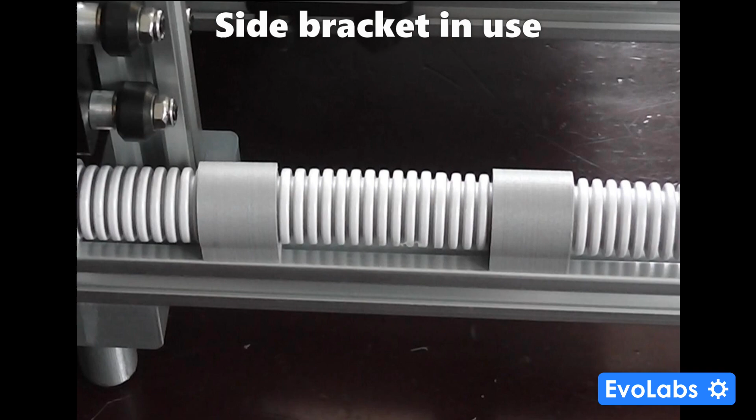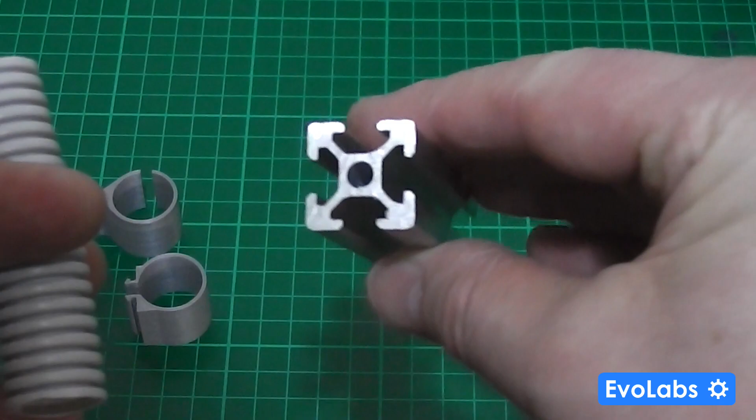So as part of my EvoLabs EV1 printer design, I'm using this 20 by 20 profile, T-slot profile aluminum for the bottom and top frame parts, and I also decided to use this 20mm conduit, this electrical conduit, to route my wires through.

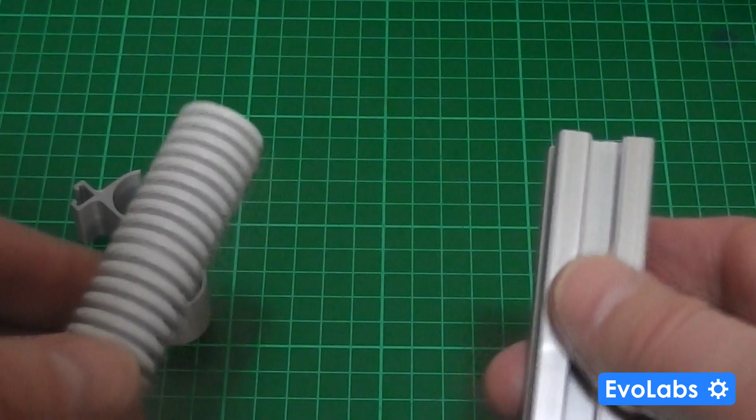And I have a constraint in that one side of the T-slot will be flush up against the proposed enclosure walls that I'll be using. So I need to have a bracket that's not going to hang off the side of the T-slot, and also be able to position the conduit either on top or at sort of at this corner angle here, simply because of the way that I've done the design and the feet for the printer that get in the way. So I ended up coming up with these bracket designs.

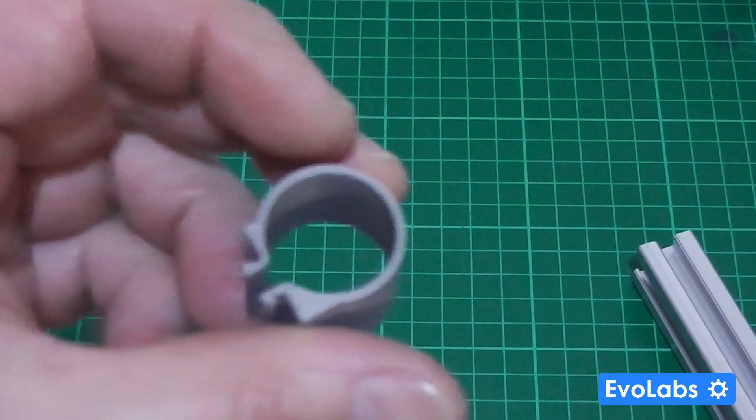So this is the first bracket design I came up with, and let's see if the camera will zoom in, focus on there. As you can see from this shot here, the slot is offset, because the intention is that this will slot into there, like so, and that there is flush. The side of the wall is flush with the side of the T-slot, so that when we place the conduit through there, like so, it's going to work, and we can still slide it.

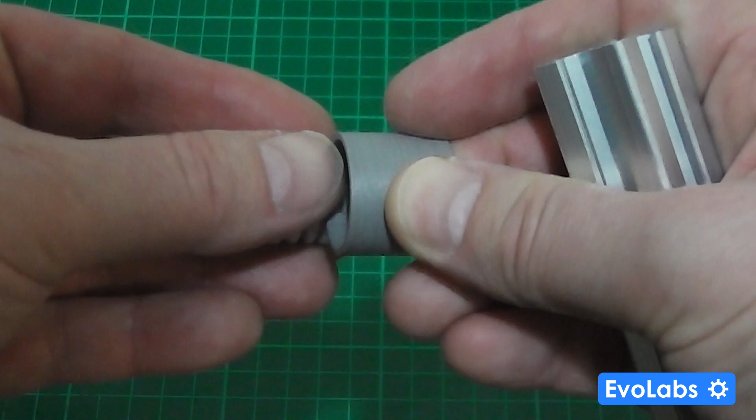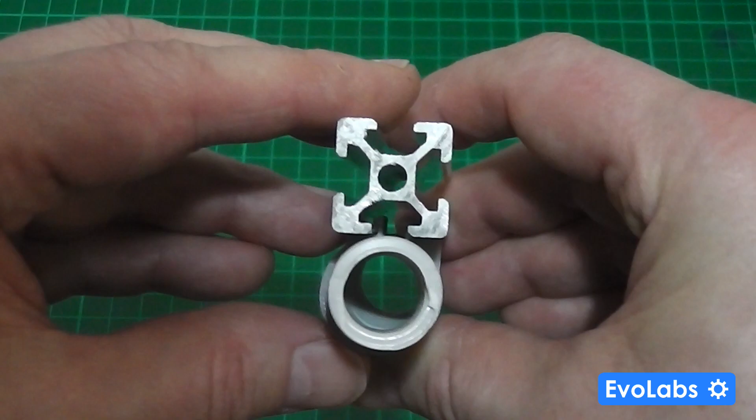So I deliberately designed this part to be flexible enough so that I can actually push the bracket over the conduit. Let's go back again. What's that? Over the conduit like so, and then if I squeeze it in tightly enough, like this, I can actually plug it in and still have it fairly nice and snug there. So that's the first bracket I came up with. So this is for when I'm running the conduit on top of the rail, or vice versa on the bottom of the rail. That's the first bracket design.

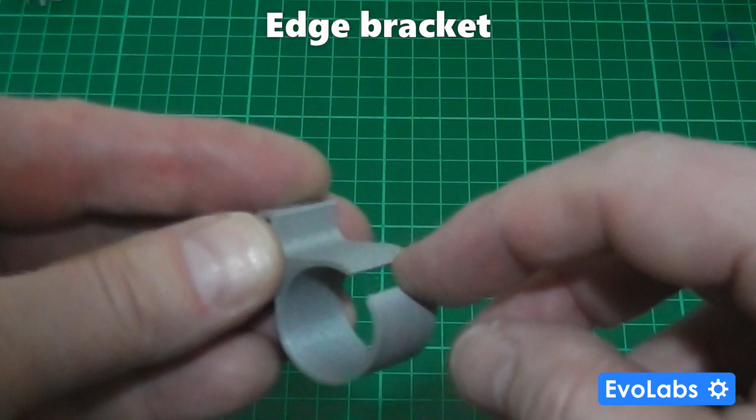And the second bracket design, as I said, has this opening here, so I can of course just slip on, if I just pull it apart, keep it in camera range, slip it on like that, as you can see there. And the intention is this is a corner bracket, so if I take my T-slot profile, the idea is it goes on like so, and I push it in, and there we go. It clips onto the corner.

And again, I can still push this back and forth if I need to. And if we need to pull this out, we can. And it's back up again, like that. So I designed both the side and the edge bracket in Fusion 360. And here's the side bracket.

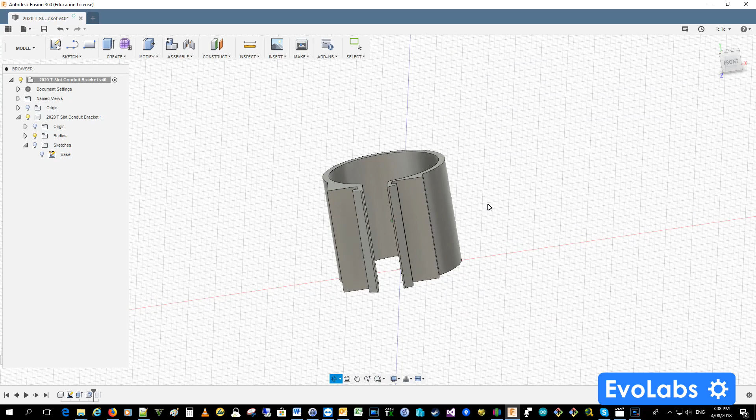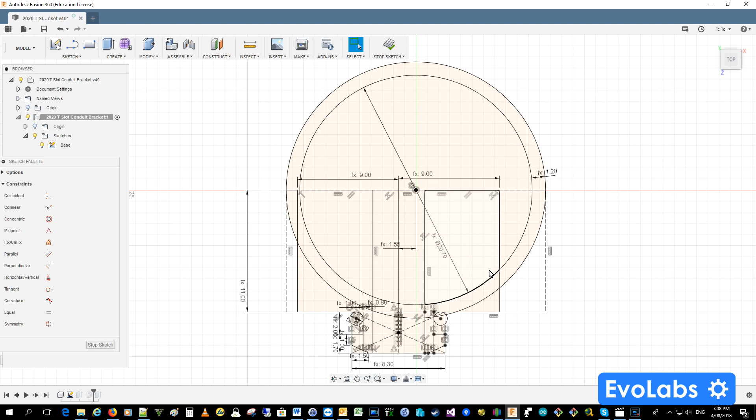And the design presented several challenges. Mainly, I needed to make sure that once the brackets were printed, they could easily be snapped into place and removed repeatedly, and their position adjusted without actually breaking the bracket itself. So I spent quite some time just tweaking the dimensions, especially for the area here, where it forms a catch to secure into the T-slot profile, and also to make sure that the wall of the bracket is strong enough to resist any pulling of the conduit as you're applying the bracket, or fixing the bracket, and also in general use.

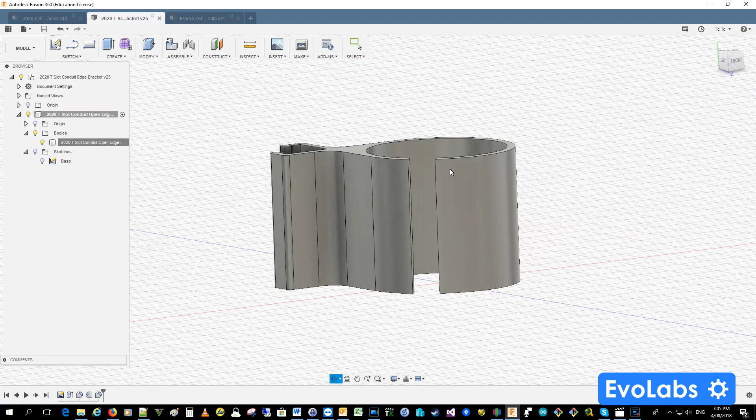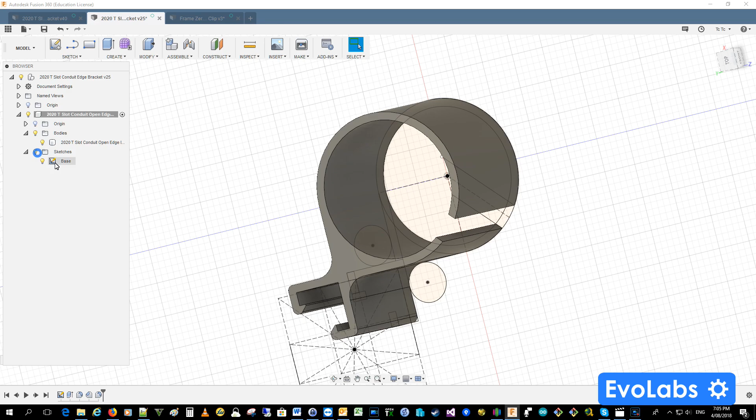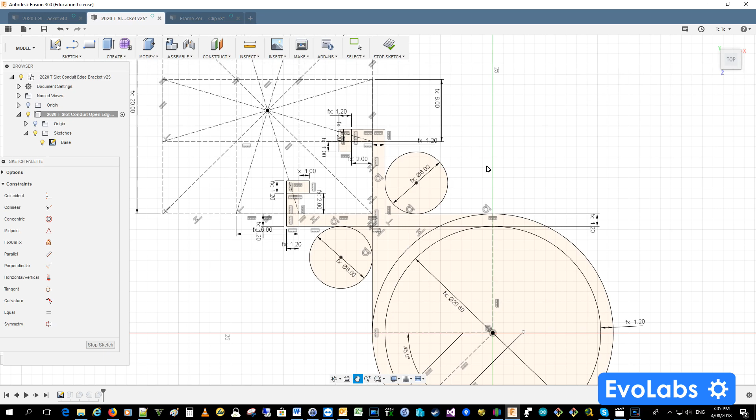So for the edge bracket, the similar challenge was to make it easily snapped into place and removed, and again, its position adjusted. And because of the way I designed the bracket to secure onto the corner of the T-slot, I needed a space within the cylinder that holds the conduit, so I could easily push the conduit onto it and pull it away. Now I could have designed this so there wasn't a slot, but it's just easier to do it that way. If there wasn't a slot, it would limit the conduit to being pushed through rather than attached when necessary.